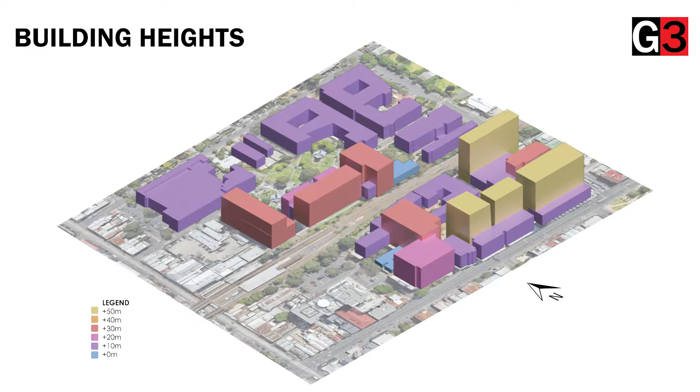Looking into the building heights, we can see in yellow that along the southern wall it contains a majority of taller buildings as well as the BA building following the buildings in red. The student residence and office management buildings are quite large and hold the potential to cast overshadowing in certain areas.

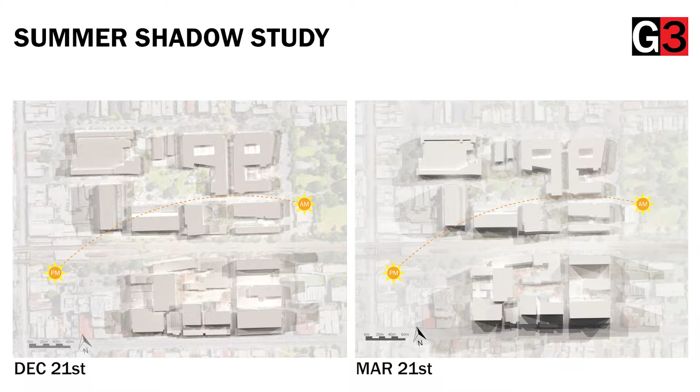Following the building height diagram, we analysed the shadows created by the buildings on the Swinburne campus on the summer and winter solstice to observe which spaces were most affected by overshading. We found that the winter solstice sun, at an angle of around 29 degrees, created an immense amount of shading in spaces that could be better utilised if it received an increased amount of solar access.

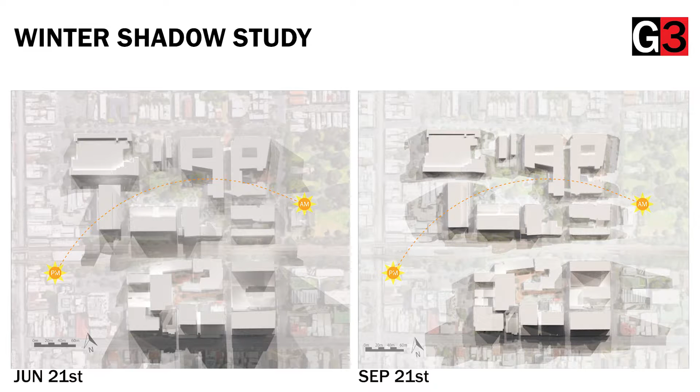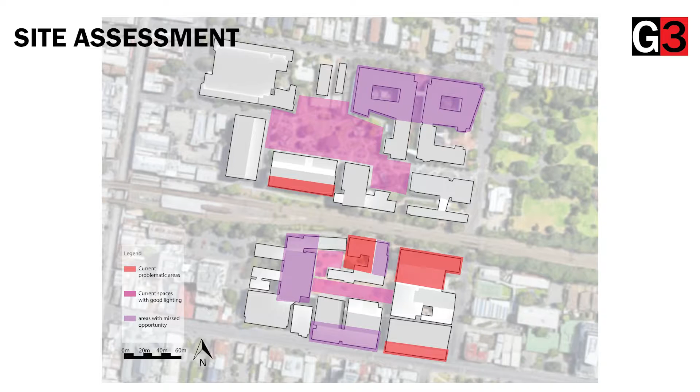This then led to us evaluating which spaces of the Swinburne campus are currently problematic due to the overshadowing, current spaces that receive sufficient lighting, and also areas that are missed opportunities in terms of inefficient human activity and the lacking of natural light.

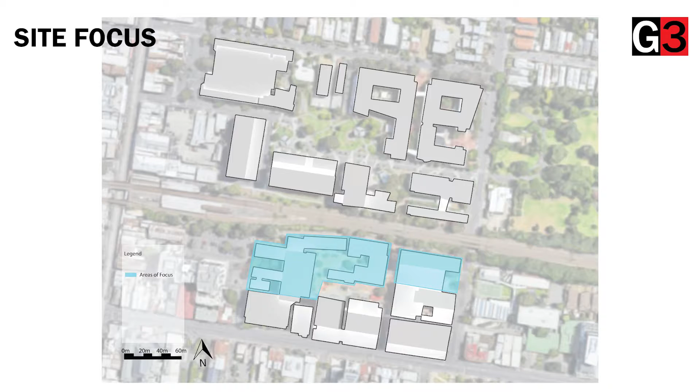The area we decided to focus on is the BA building and the atrium, as well as the courtyard out the front of the engineering building, where it is surrounded by the AR and AD building.

In the beginning of the design stages, we implemented different approaches and methods to alter the building structures and manipulate the natural light access into the different spaces. These methods are splitting, drilling, and slicing.

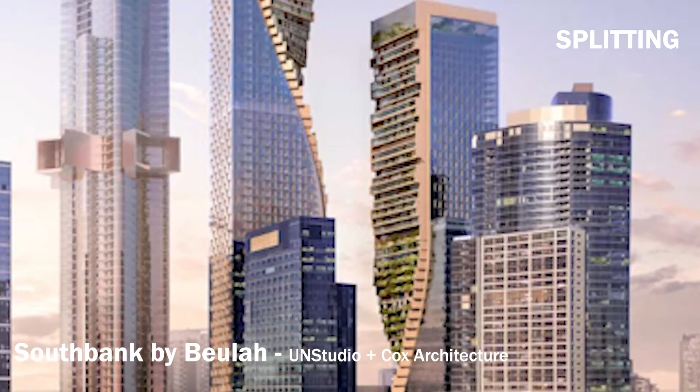A prime example of these methods is Southbank by Beulah, Morpheus Hotel, and Solar Carve, where they have placed holes through the structures to allow sunlight to pass through. They are even sculpted by the angles of the sun, exploring how shaping architecture in response to solar access and other site specifics can expand its potential to have a positive impact on its environment.

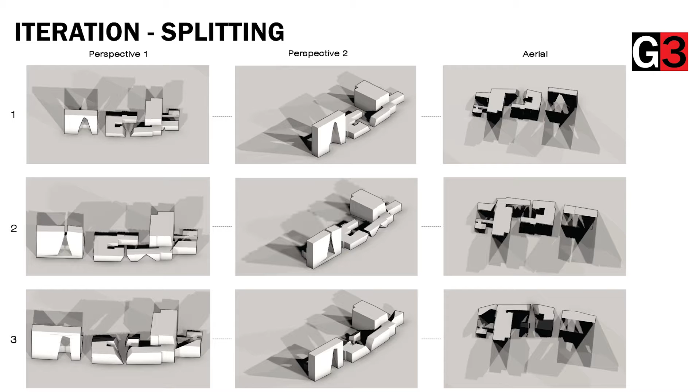By applying the three approaches, we were able to come up with different types of iterations that responded to the angles of the sun's path, opening up spaces to capture more natural light in certain areas, better enhancing the user's experience on campus. The splitting approach worked best on the BA building to allow light through the atrium.

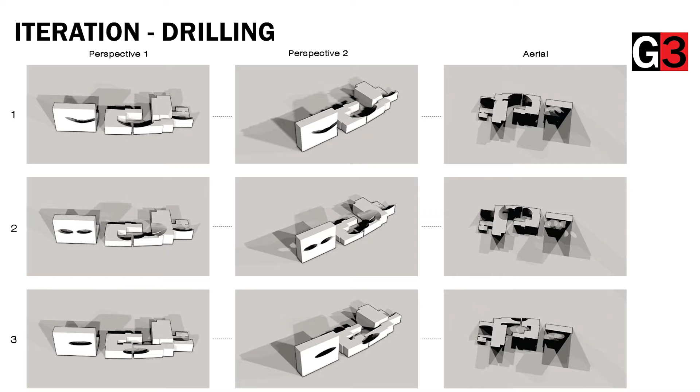Whereas the drilling method was most beneficial on the surrounding buildings of the courtyard that allows light access into the space. And finally, the slicing approach was most effective on the edges of the buildings to allow natural light to enter at the start and the end of day.

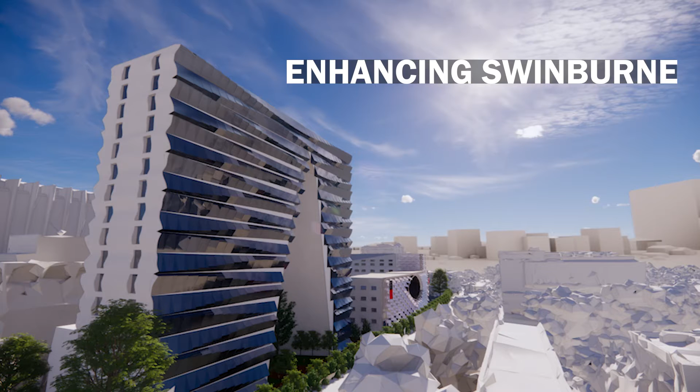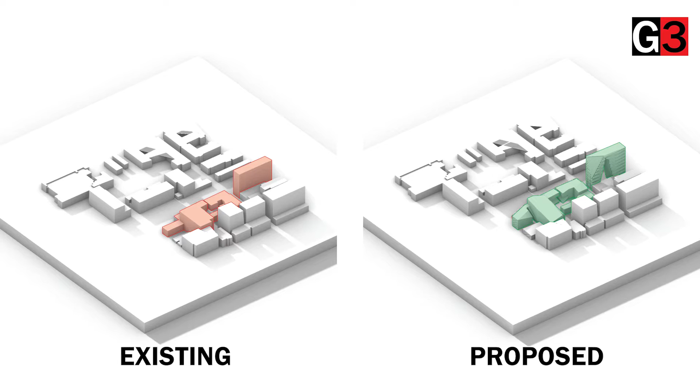Our final design, aptly named Enhancing Swinburne, is a culmination of our solar access exploration that offered the most effective results in introducing natural light into the targeted spaces. As you can see in the existing versus proposed diagram, the improved network of university buildings have also been heavily remodelled to better fit a modern progressive Swinburne identity.

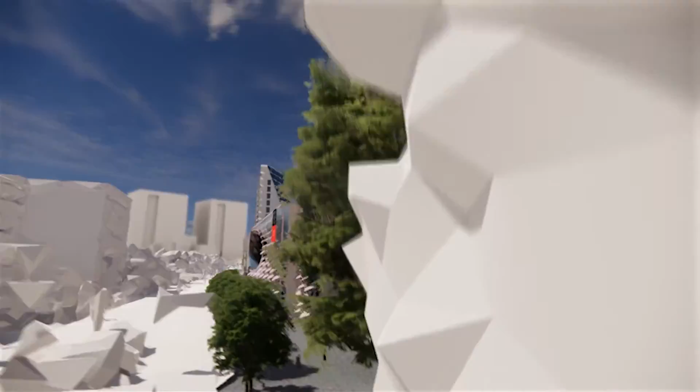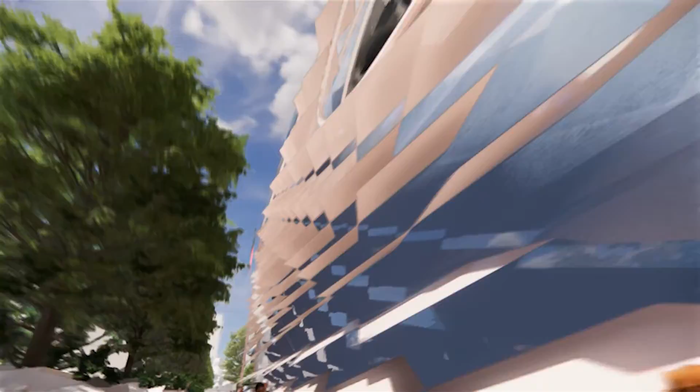Previously, the northern facade of the EN, AR and AD buildings poorly utilised their constant daylight. So by introducing a double glazed curtain wall with self-orientating panelling system, the space will receive indirect sunlight, resulting in a set of beautiful study spaces and classrooms. The BA building also achieves a more productive and vibrant workspace through its new angled modulated window scheme.

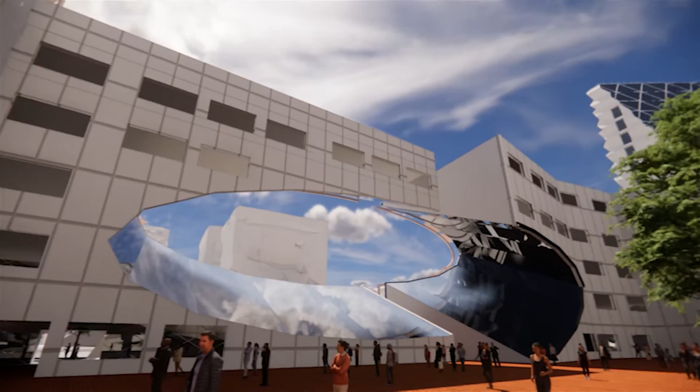What was once a depressing university entrance and cafe hangout has now been transformed into Swinburne's most unique and exciting courtyard. Through the introduction of a void in the AR building, the space has been given a new dynamic energy. The splitting of the BA building finally provides Swinburne Atrium the energy that the heart of the campus needs.

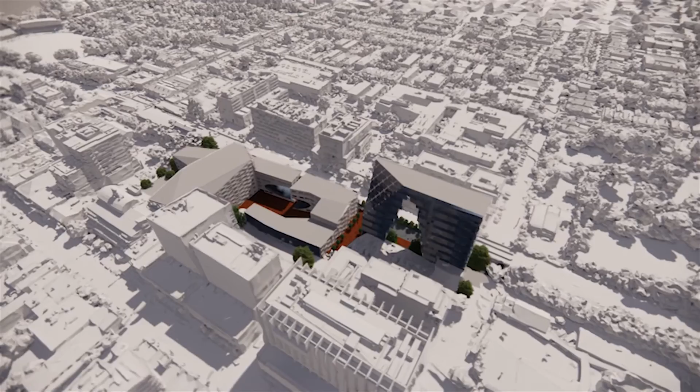Direct and indirect sunlight exposure through the day hopes to create a positive atmosphere which will promote a deeper interaction between students and their university hub, and ultimately create a more engaging environment for site users.